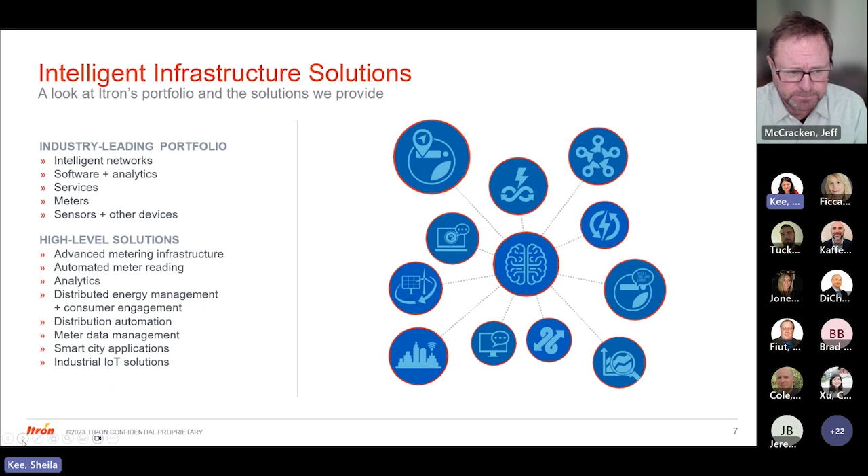So we know everyone's on a different journey, but what we're offering from a water end-to-end solution is a solution that's not dependent on where you're at in that journey. We can start you off with solutions to help with manual meter reading, and all of this is based on Temetra. If you're transitioning from manual reading to AMR, we can provide drive-by, walk-by solutions as well as the communication modules for those meters.

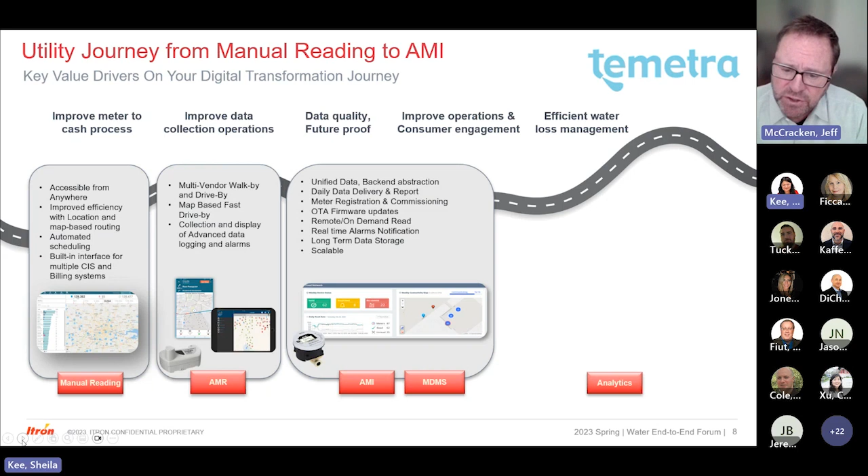And then as you transition from AMR to AMI and MDM, we can provide a full solution there with a unified backend, over-the-air firmware, remote shutoffs, long-term data storage, and all the analytics associated with that more granular AMI data, which we are going to demo today to show you how we can use that data to help manage your water losses. So anywhere on that path, we can help you migrate from one to the other, or just help from where you're at on that path, and help you improve your digital transformation at the utility.

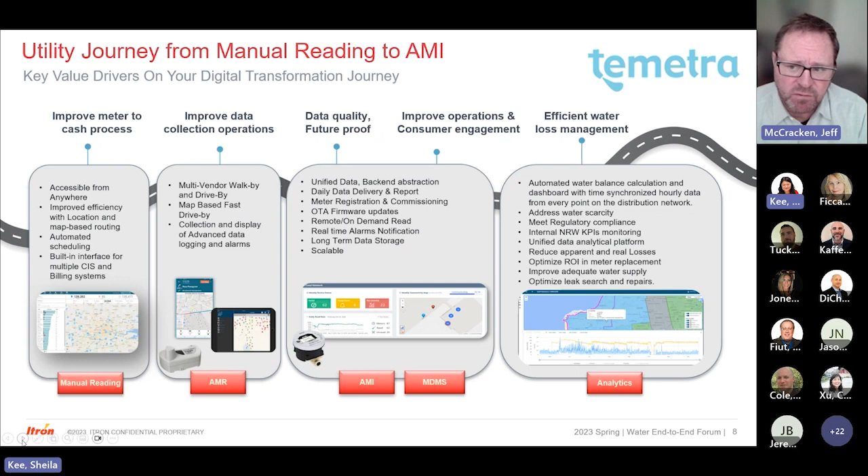With that, I'm going to turn it over to Brett Kaffenberger to talk about meters and AMI essentials. Thank you, Jeff. Welcome, everybody. My name is Brett Kaffenberger. I'm the line of business manager for our global water networks. So we're going to talk a little bit about water metering, and then I'm going to hand that off to Carmen. She's going to go into some more details on our cellular water solution.

So starting out here talking about meters, our modules essentially are compatible with every meter manufacturer that you're going to come across in North America. That includes pulse output and encoder output. So we maintain that as we always have, as essentially a differentiator, being able to read all these different meters from mechanical. Pulse is still used on compound meters, so you still see those out there. But just about everything else is moving to encoder. And then in addition to that, if you could go to the next slide, please.

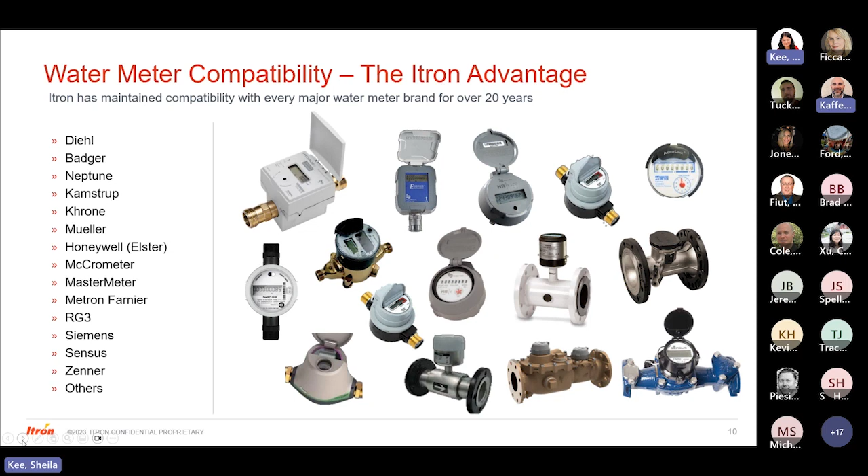In addition to that, we have extended alarms. So with our 500W series, whether it's our Gen X product line or it's our cellular product, we bring those extended alarms back over the network and display those in Temetra, which Brian will get into a little more as we move forward.

So what that essentially is: any of our radio modules, the 100W, 500W, will read the ultrasonic meters. But each ultrasonic meter, static meter in general, has an extended protocol that they can send out that gives you additional alarms such as empty pipe, temperature threshold, high flow, zero consumption, low battery, a tamper or cut cable alarm, reverse flow. And some of these are redundant in our radio module, but some of these are specific to the meter. So for the extended alarms, we support the Diehl Hydrus meter, the Kamstrup flowIQ, and the Badger E-Series meter. Next slide, please.

Okay, so talk a little bit about Diehl. So Diehl is the meter that we go to market with in North America. We have a strategic partnership with Diehl. For those of you that aren't aware of Diehl or don't know much about them, Diehl is a large global company, one of the top meter manufacturers globally.

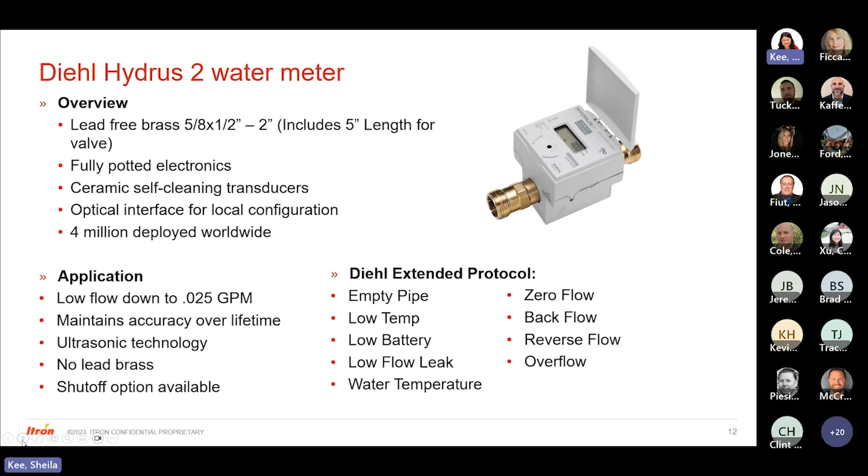So having said that, I will turn this over to Carmen to talk a little bit more about the cellular water solution. Carmen? Thanks, Brett. Again, it's Carmen Xu here. I'm the solution owner for AMI Essential Water and Gas. And today, I would like to share the exciting news with you with regards to the new bundle solutions for cellular AMI Essentials for water.

So let's talk about what's essentials. Semantically, we've been using this term to designate something that is necessary. It's absolutely needed, it's extremely important, minimally required, and we cannot do without. And Itron has begun using this term to describe the most core and basic offering for a lot of our products and solutions. And this includes meter data management with IEE, AMI Essential for electric.

So nothing new. We are expanding the same model, which is AMI Essential, what is basic and core, to AMI Essentials Water. And that's what I would like to share with this group, what exactly it is, what does it entail, and what are the value propositions. As you could see from this slide here, we try to make the solutions easy, meaning it has to be easy to deploy, no hassles to manage the system, and therefore this AMI Essential Water solution is a bundled solution that covers 4 elements.

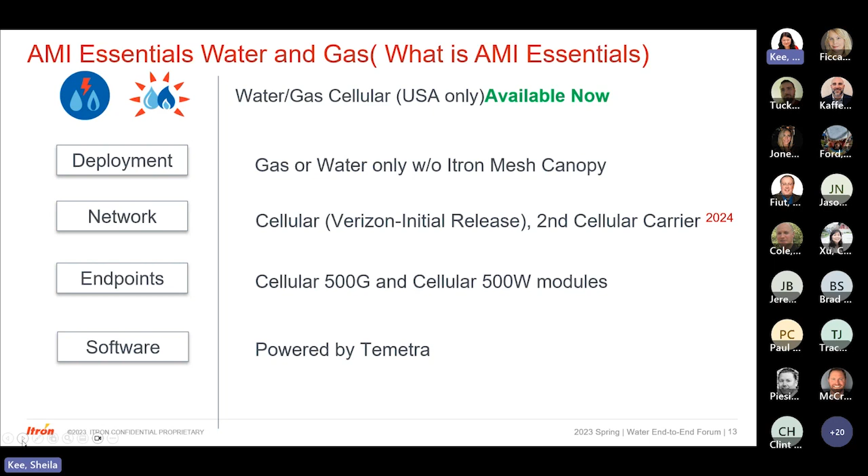So now we have a good idea of what AMI Essential Water offers. Who are the targeted customers? What are the number of endpoints? Like I mentioned earlier, this is a bundled repackaged solution that combines cellular technology, and our initial target market is US only. The reason is that right now we are working with Verizon, and we'll be able to get the Verizon network integrated with our endpoints.

However, we are working to expand from just Verizon to other cellular carriers, as well as other markets, including Canada. All of those items have been roadmapped, and once we have a committed date, we will share that back with this team. From a total endpoint per customer perspective, the solution covers any endpoint size per customer that's less than 200K.

The way we're going to sell the solution is to partner with our Itron channel partners, many of whom I saw on the call, as well as selling it directly to Itron accounts where a channel partner is not present. And as I mentioned on the previous slide, AMI Essential covers the cellular endpoints. It also includes management of the cellular network. The first cellular carrier is Verizon, more to come in the future.

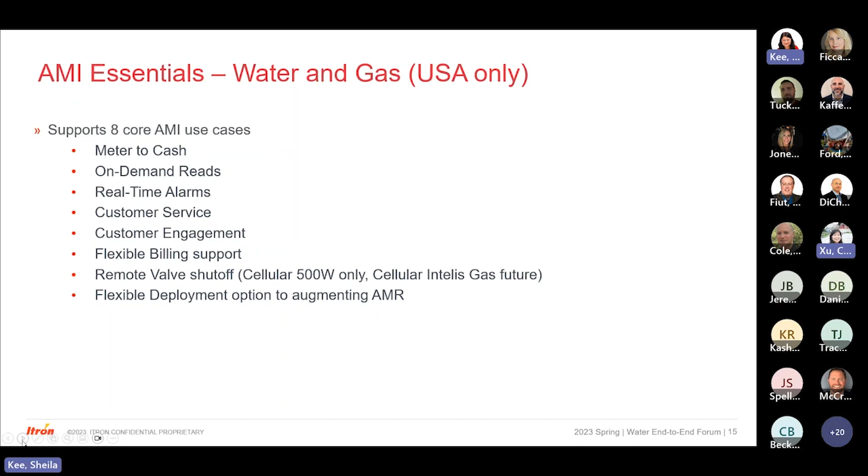And then lastly, flexible deployment options to augment AMR. So for a lot of the customers that currently are still on AMR deployments, having this AMI Essential cellular water solution ready offers you the flexibility to deploy cellular solutions to your maybe high value C&I customers and hard to access mobile routes as a complement to your AMR solution. So overall, those 8 use cases will be covered all under AMI Essential Water. Next slide, please.

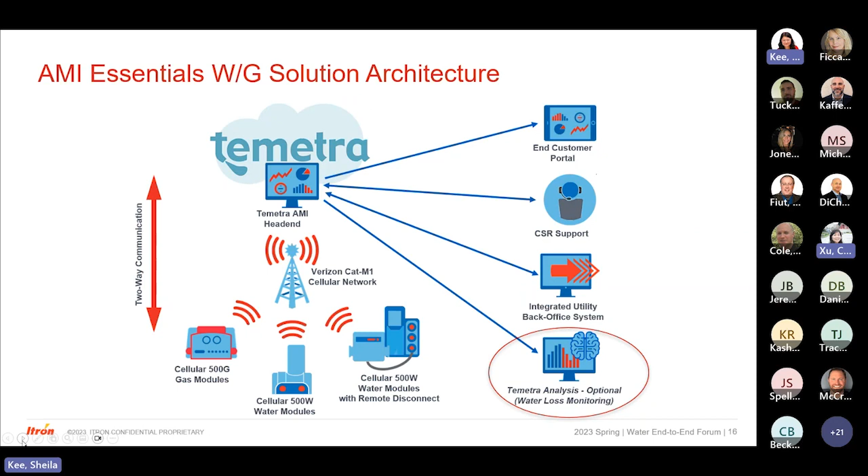All right, so we talked about the overall solution overview. Let's do a little bit of deep dive on the endpoint itself. No different than, I would say, the 500W endpoints that you guys have, it offers a similar functionality, meaning not only does it have the cellular capability, in addition it also has RF capability that is being added into a single communication module.

Why are we doing that? For example, if there is non-sufficient cellular coverage for a certain area, then you could turn on the RF capability to allow for a mobile network contingency read that will allow your billing data to still come in. So that is the beauty of having both cellular and RF capability in a single communication module on the Itron 500 cellular devices.

I did mention earlier, it is infrastructure free, meaning that you really don't need to have any APs or a centralized data collection unit, because we're leveraging Verizon's network. And the cellular 500W module supports the valve shutoff feature, which I mentioned earlier. And I already talked about the full 2-way cellular support that comes with our RF mobile contingency read in case there's not sufficient cellular coverage for a certain area.

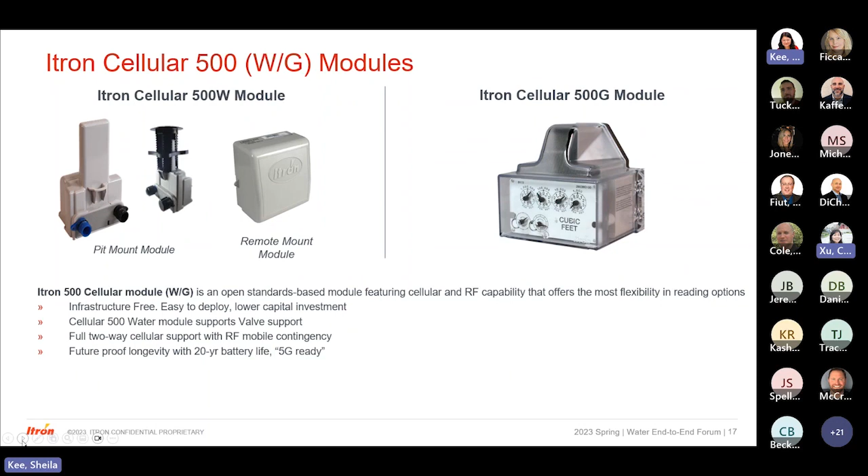So I want to pitch a little bit on cellular network as a service. Why is this a good value proposition? Why should we be offering cellular network as a service as part of our bundled solutions? Because number one, it really eliminates the challenge where you need to find towers to hang your data collection units. With the cellular solutions, even if you couldn't find any light posts to hang the APs, that's not a concern anymore, because you could have direct connections via the Verizon carrier-grade cellular network, and you'll be able to leverage cellular precisely when and where it makes sense.

And it does provide a good solution to bridge the gap for those hard to reach areas without extensive hardware installations like the mesh technology has. And I already talked about it's flexible, and you could certainly scale up and scale down. And it's very easy to deploy with very few components, as I articulated in the previous architecture slide. We talked about Itron's managed service, which removes all the setup, the carrier, and managing the network. All of this will be done by Itron on behalf of all our customers.

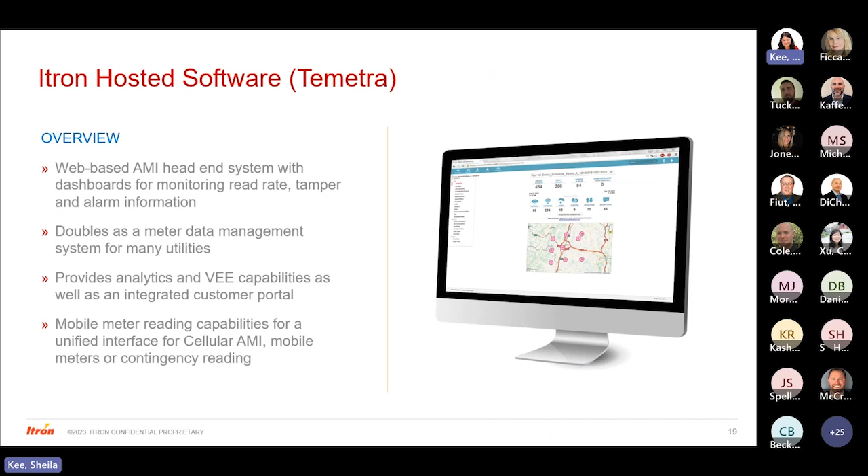The next two slides here: we're so excited about this new release of AMI Essential Water launch. And what Itron has done is that we put together what we call a Get Started Kit promo. The key driver of it is to offer an introductory level pricing to customers who are interested to prove out the cellular platform as well as Temetra benefits for a 12-month period.

Targeted customers are channel partners, or if there are direct accounts that do not have channel partner presence, certainly we can offer this starter kit promotion to those customers. From an eligibility perspective, any greenfield cellular customers are eligible to receive this introductory level pricing, which is the Get Started Kit. It is available now. So if you are interested, please reach out to your sales team to get more information on what it entails and what the pricing would be for the starter kit.

And I believe the next slide is my next slide here. So just a very quick overview on what the starter kit looks like, right? It comes with 100 units of cellular 500W, and it is promotional hardware pricing, which is limited to the initial 100 units. Anything above and beyond 100 units as incremental units will be charged at distributor list pricing.

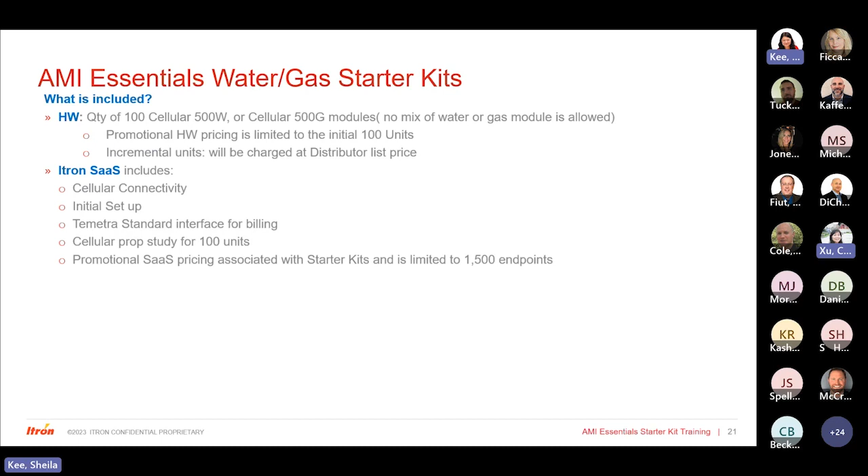So just to give you an idea of what it entails from a Get Started Kit perspective. Again, if you're interested, reach out to your sales team, and we'll be happy to share the pricing and more details with you guys. I think that concludes my last section.

Oh, I lied. So now let's say you have AMI Essential Water deployed. What are the future use cases that you could add on after you deploy AMI Essential Water solutions? Certainly from a water bucket space, there are a lot of water analytics offerings that we can add on to these AMI Essential solutions. That includes pump and energy optimization, water conservation management, pipe asset management, pressure monitoring, as well as leak management with acoustic sensors, sanitary sewer overflow monitoring and water quality monitoring. So having the ability to build that AMI Essential foundation is the key to expand those future use cases.

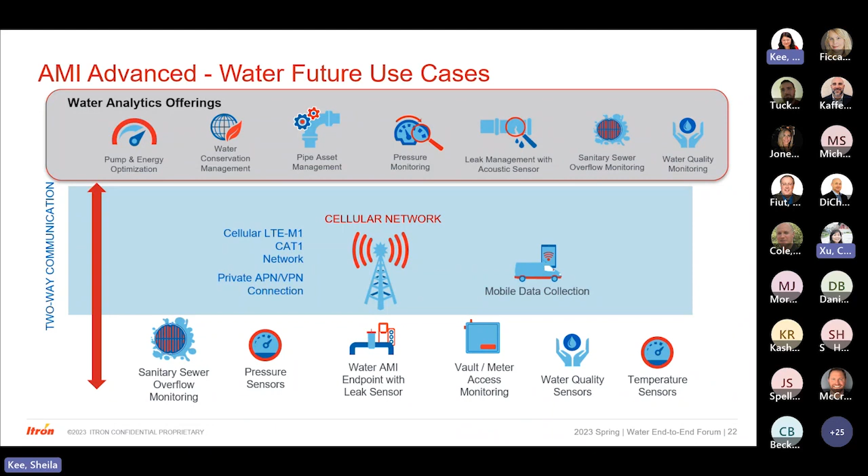Which I think takes us to the end of my presentation. And now let me just transition my section to Brian Tucker, who's going to talk about AMR to AMI. Awesome. Well, thank you, Sheila. Appreciate it. As Sheila said, my name is Brian Tucker. I'm a product manager with Itron working on our Temetra solution. And I'll be walking you through a few slides on how Temetra plays a role in transitioning from AMR to AMI.

So real quick, a high-level solution overview, just so we're all on the same page with the different pieces here. Our Temetra solution consists of two primary components. That's the Temetra web application, which is really the back office piece of the solution. That's your head end for an AMI customer. If you're a mobile customer, that's where you're going to be doing your route dispatching from, running your reports from, and ultimately interfacing to your billing system from.

The other piece to the solution is the Temetra mobile app. If you're familiar with our Itron mobile app, the Temetra mobile app is built on that. It looks 90% the same, which is nice for you as a utility because that means you have a very small learning curve to move your field employees over from Itron mobile to the Temetra mobile app. Of course, Temetra is also fully integrated with our cellular AMI solution. So if you choose to deploy cellular endpoints, those are natively integrated with our Temetra application.

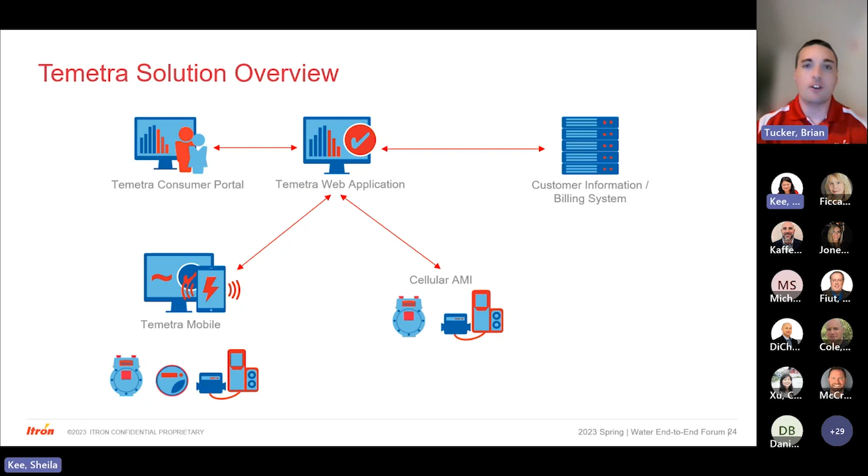And then again, those consumers, whether you're reading their meter with a mobile collector, an Itron mobile radio, or whether they're a cellular AMI customer and you're reading their meter multiple times a day, all of that data, as soon as it's available in the web application, is going to be made available with no additional effort on your part in that consumer portal. Want to go next slide?

Okay, so again, our theme here is moving from AMR to AMI and the role that Temetra plays in that transition. Because we know that many customers are still doing mobile meter reading today. Of course, there's aspirations and a lot of utilities are now wanting to move to AMI, but where they're at today in a lot of cases is still doing mobile or even keyed reads.

And so it's important that we pause and acknowledge that and talk a little bit about how we meet you where you're at today with those operations and how Temetra could start bringing you value right now for your operations, even without deploying AMI. And a couple of key pieces here, especially for our MVRS and our FCS customers, is that they can move to Temetra and generally keep their billing interface exactly the same as it is today.

And so if you're an MVRS customer or an FCS customer and you're still relying on and utilizing the host download and the host upload file formats to interface to MVRS or FCS, you can move those forward to Temetra, start passing those files to Temetra. And generally what we've seen is that customers have had to make little or no changes to those file formats to start using Temetra for their mobile meter reading operations.

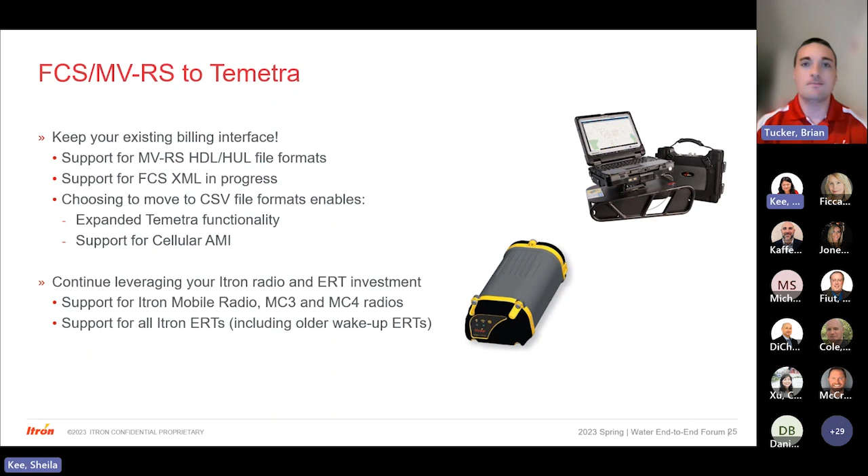All right, so as part of this move to Temetra, we've talked about how, as a mobile customer, as an AMR customer, you can move to Temetra today, and we've tried to make that transition as seamless as possible for you. And the good news is, even as a mobile customer, of course, we want you to move to AMI. We know a lot of you want to move to AMI, but even as a mobile customer, you're still going to see a lot of benefit and a lot of value by moving to Temetra from FCS or MVRS.

A few points there, map-based routing. So Temetra has the ability to allow you to pull up a map view, which will show you where all of your meters are deployed throughout your service territory. And from that map view, what you can actually start doing is lassoing certain meters within your territory and creating or modifying your schedules and your assignments to your field staff through that map-based view.

That can bring a lot of value for things like ad hoc routing tasks. If you're doing theft investigation and sending people out just to specific meters, that can help you a lot in terms of making that work more efficient, because now you can actually look at a map and create those assignments based on where it makes sense. So you can grab the meters in the north part of your territory or the northeast part of your territory, grab those meters, assign that work to the field employee who it makes the most sense to be doing that work, and so on and so forth.

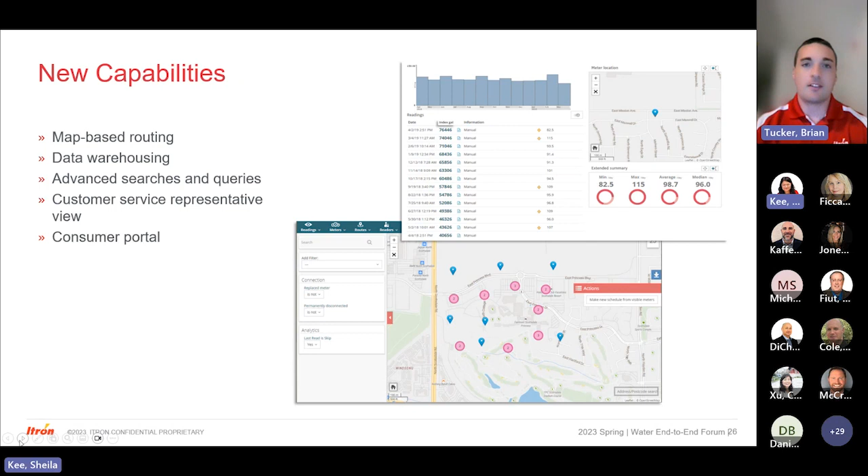Okay, so we've talked about the mobile value adds, the mobile migration to Temetra. Now you're ready to start moving to AMI, and you'd like to start sampling some cellular endpoints. By moving to AMI with Temetra, you're really going to simplify your AMI migration, because you can move to it at your own pace. You can continue leveraging Temetra for your mobile operations where it makes sense, while you roll out those cellular endpoints, maybe to your harder to read areas or those remote areas where it's really painful to read with mobile. And then continue rolling out those cellular endpoints when the funds are available and where it makes sense to do so.

While you're rolling out those cellular endpoints, Temetra is still going to be your head end. Temetra is still going to be your data warehouse, and your billing interface point is going to remain the same, whether you're talking about a mobile meter or an AMI meter or a keyed read meter. Your billing interface will remain the same, and you're not going to have to touch that and modify that, other than, again, providing us a CSV file with some information about those cellular endpoints.

And what this means is you're going to have a single interface point for all of your meter reading operations. You're not going to have to train your users on new interfaces as part of your transition to AMI. You're not going to have to necessarily go out and build a whole new interface as part of that transition to AMI. You'll see a couple of new workbenches appear in Temetra that'll allow you to view the status of that AMI solution. You can see an example of one of those workbenches within Temetra, where we're showing you how many valid reads we've been processing from the AMI solution.

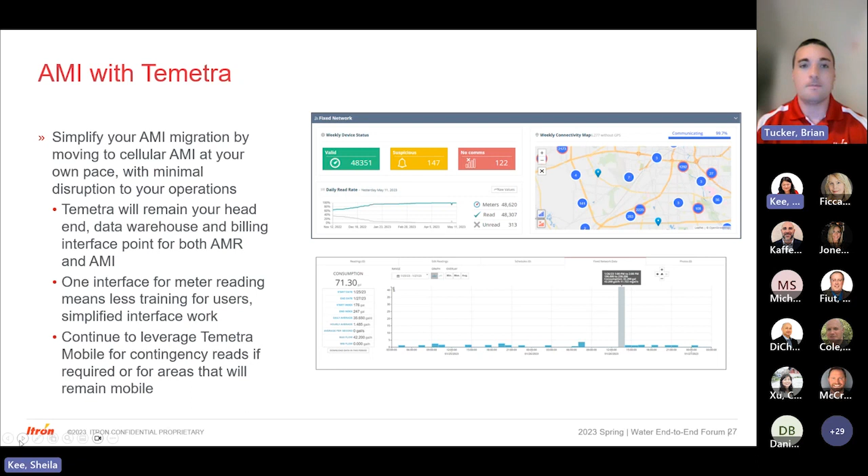All right, and now I'll turn it over to Sheila Kee, our Senior Product Manager, to talk through Temetra and Temetra Analysis. Thanks, Brian. Hi, everyone. I'm Sheila Kee, Senior Product Manager for Temetra Analysis, and let me advance the slide. As you have heard from Carmen and Brian, they've talked about AMI Essentials and Temetra, so I wanted to show you where Temetra Analysis lies under the Temetra umbrella.

So we'll go through the Temetra Analysis offerings in detail today. In this chart, you'll see eventually the entirety of our Temetra Analysis offerings. So you have the operational visibility application, which really is that automated water balance, whether it is hourly, daily, or monthly, monitoring your water loss KPI. There is also visualization of hourly flow, pressure, and tank levels, along with 48 hours of forecasting that provides the utility with that holistic view of your historical usage.

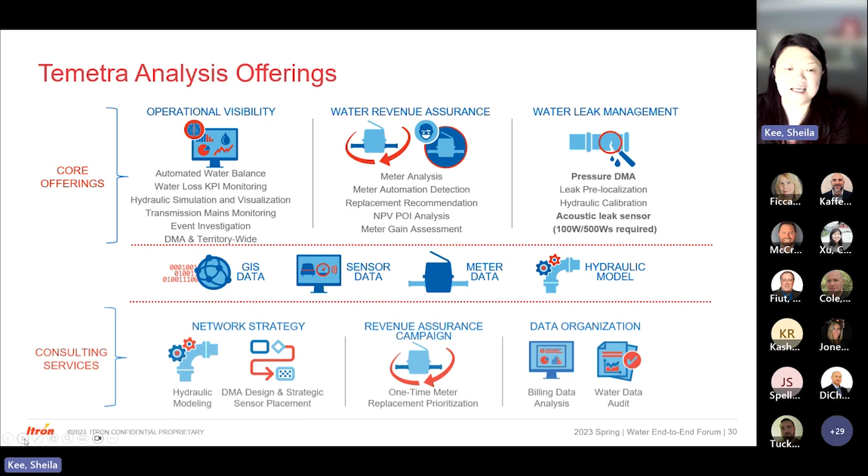For water leak management, Itron has two ways in which we can provide leak pre-localization. One of them is with the use of pressure sensor data and updated hydraulic models, and the other is with acoustic leak sensors, which do not need the presence of district meter areas, but you would generally need an Itron network to be in place. So we'll expand on these two offerings in the later slides. In addition, we can also provide a wide range of consulting services such as hydraulic modeling, design planning, strategic sensor placement, one-time meter replacement prioritization, billing data analysis, and water data audit.

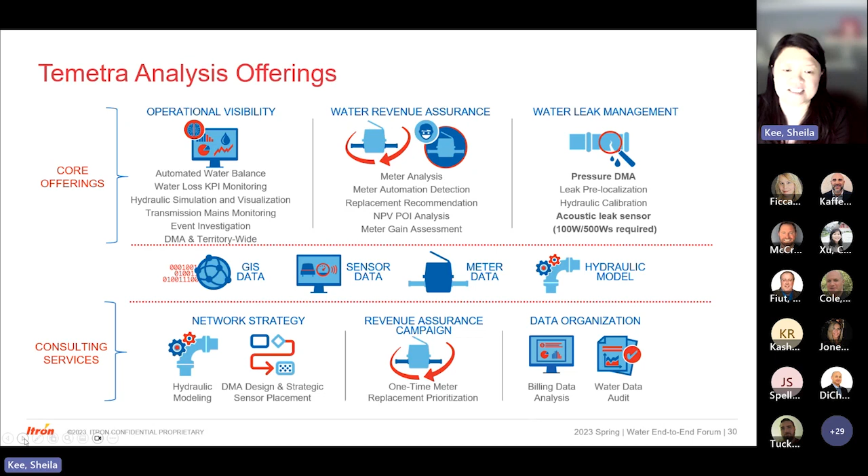So how does Temetra Analysis tie everything together? Let's look at the data flow with Temetra Analysis. So one of the data requirements to calculate the water balance table is consumption data. Consumption data can be collected via different types of Itron networks, such as your Water Cellular, GenX, Choice Connect. We can also ingest data from third-party systems, such as your GIS, hydraulic models, and SCADA. So through these actions, we can enable new outcomes that are focused on monitoring, measuring, and reducing water losses.

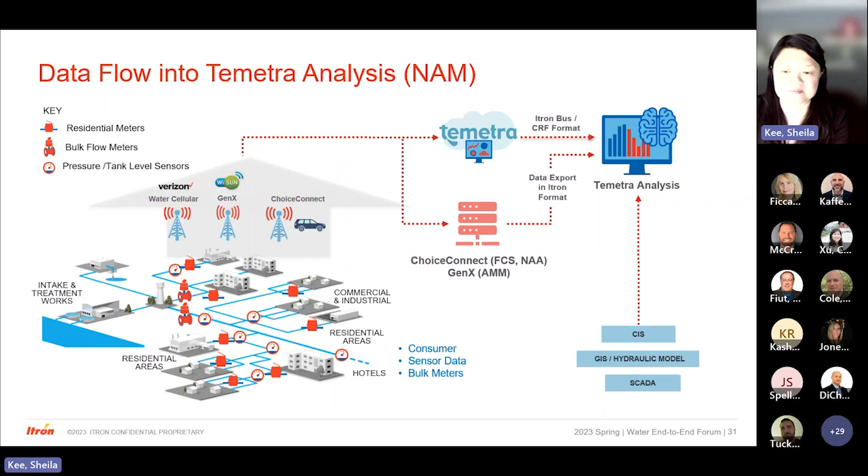So how do we achieve data readiness in managing water loss? This is really important. Traditional operations data sources include SCADA systems that collect and store data at very small intervals. GIS allows the users to access data in a geographic or spatial context like a map. This is especially important for utility operations. Your hydraulic models are used to optimize the network, help identify leaks, and help with seasonal demand fluctuation simulations. For drinking water utilities, meters represent a huge source of data that can be collected with the system. So AMI systems like Water Cellular, Choice Connect Fixed Network can help to automate your meter reading, your billing, and your collection process. So this really provides the utility with critical data and insights into the network infrastructure and customer behavior.

So we're able to ingest all of this data into our unified Temetra Analysis platform, where we would perform data cleaning, looking at data integrity and data completeness. So what does this mean? Data cleaning is basically the process of detecting and correcting or removing any corrupt data or inaccurate records from the database. Data integrity is the accuracy and the consistency of the data. Data completeness is the comprehensiveness or the wholeness of the data. There should be no gaps or missing information for the data to be truly complete. Sometimes incomplete data is unusable, but often it still can be used even with missing data. So in Temetra Analysis, we have the ability to gap fill the data.

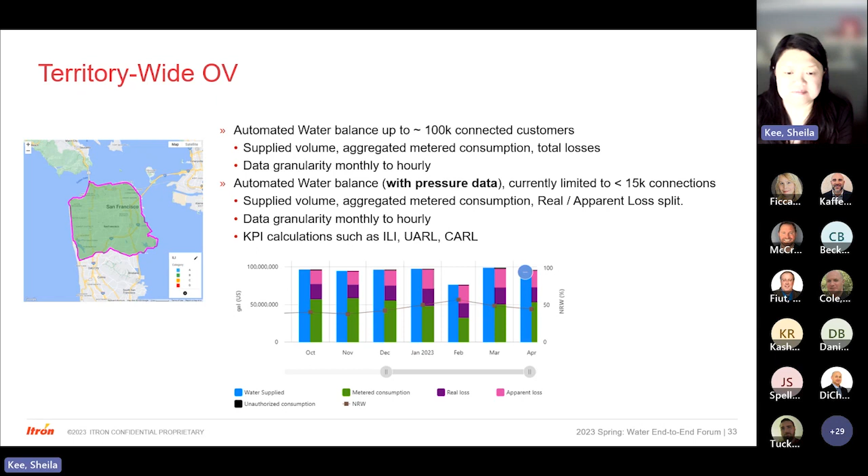And for the purpose of today's demo, I'm going to hand it off to Brian, and he's going to show you a demonstration of operational visibility. Brian.

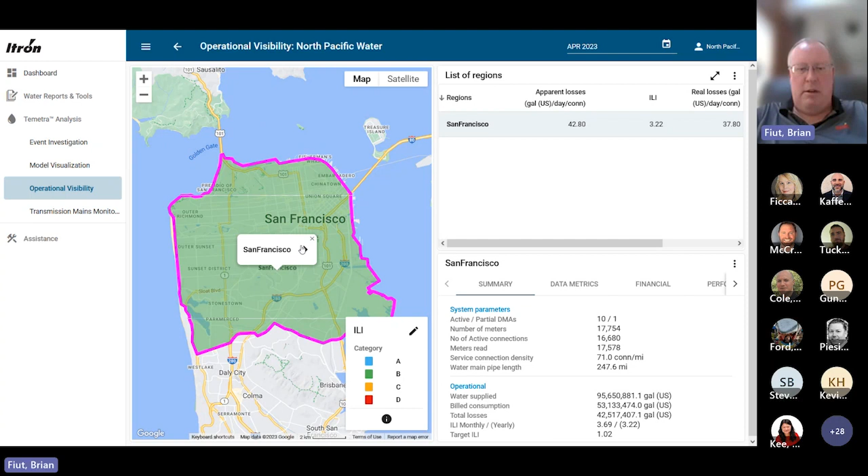So what we're going to do now is we're going to zoom in. I'm going to click on this arrow here, and it's going to take us basically to the same map, right? But you can see now that this Bay Area has been broken up into a variety of different districts, or DMAs, district metering areas. And we've employed a color coding technique.

Green good, red bad. I thought of that.

No, not really. But you can see over here, this table tells you sort of what the color coding is. Blue has an ILI, or an infrastructure leak index, sort of a comparative analysis, apples to apples against other utilities and standards. So we've got an ILI here from 1 to 2 is very good. That's your blue districts. Good, an ILI of 2 to 4 is green. Amber is getting worse. That's from 4 to 8 of an ILI. And red bad, green good, red bad. 8 or greater is considered a very poorly performing DMA.

So we've got a map view here. We can also switch to list view. And in this case, you now get a working list of all the same information, right? You can sort this by a variety of different KPIs. I can bring my top offenders into view here. For example, I've got ILI here. If I sort on ILI, I can see that my worst offender of all of those districts in my territory, pretty much by far, is DMA number 4. So I think we may want to come back and take a look at that a little bit later.

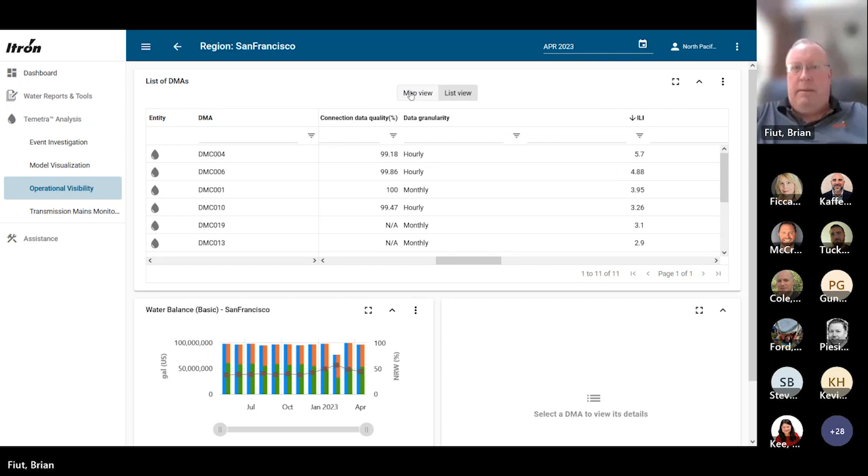Let's switch back to our map view. And then down below the map view is what we call the water balance table. All right, pretty straightforward. This is being presented with monthly data. So either we got monthly reads or we rolled up hourly data to represent monthly. And what you see here, I'll go ahead and blow this out so you can see it a little clearer. What you see month by month is your water balance up until the most recent month.

So the blue bar on the left of each month is the amount of water that was metered in through a bulk inflow meter, sometimes called a master meter. On the right, you have the green bar, which is the amount of water that was metered out by all of your meters, simultaneously aggregated and compared to the same time frame as the master meter. And then the red is your non-revenue water. And in this case, we're not doing so red hot. We're at about 44.45% non-revenue water. And this is for the entire region.

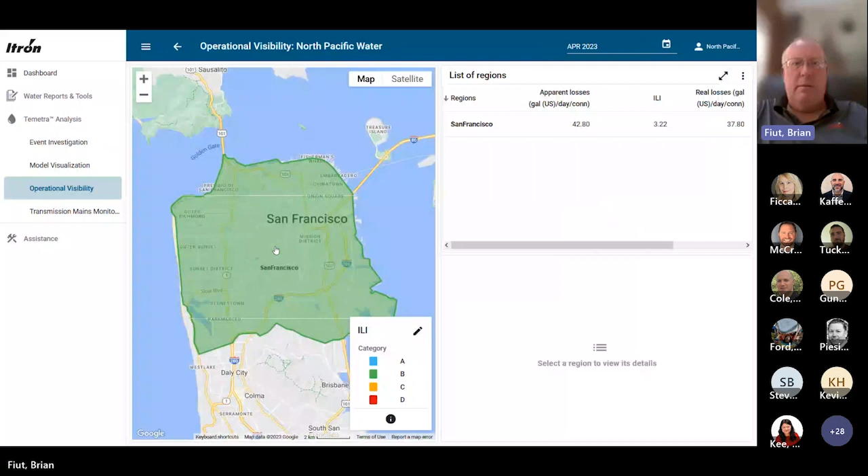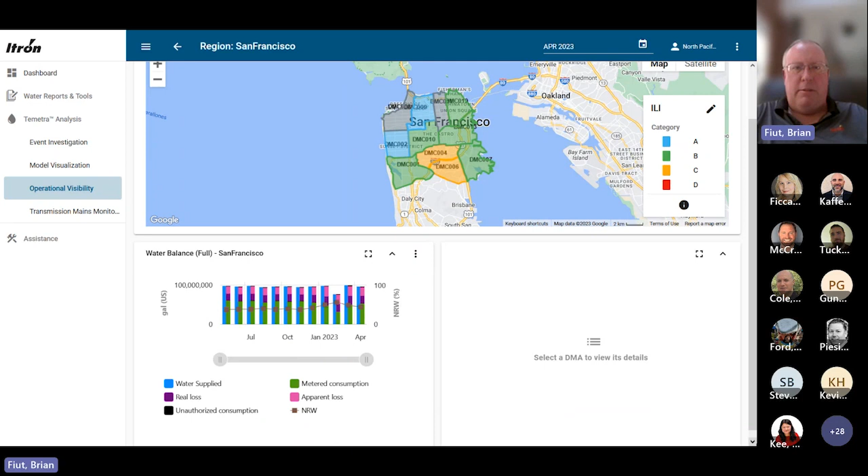Let me blow that back out. Oops, I'm going to reset here. Yeah, there we go. As I mentioned, we can break that non-revenue water down into a full water balance, which, as you can see now, the colors have changed from red to different hues of purple. The light purple or magenta, alert for you Get Smart fans, is an apparent loss. Okay, and the dark purple are your real losses.

So scrolling back up here, you can see that this is the KPI that I'm using now, the ILI. There's a variety of other KPIs that I can rearrange and look at the data with, including real loss. So let's take a look. And did you see how the map changed? Some areas became green from a leak perspective, while others turned amber. And so now, since I've got new information and a new presentment, I can drill into that and take a look at what's going on here. Let's take a look at this amber district number 6.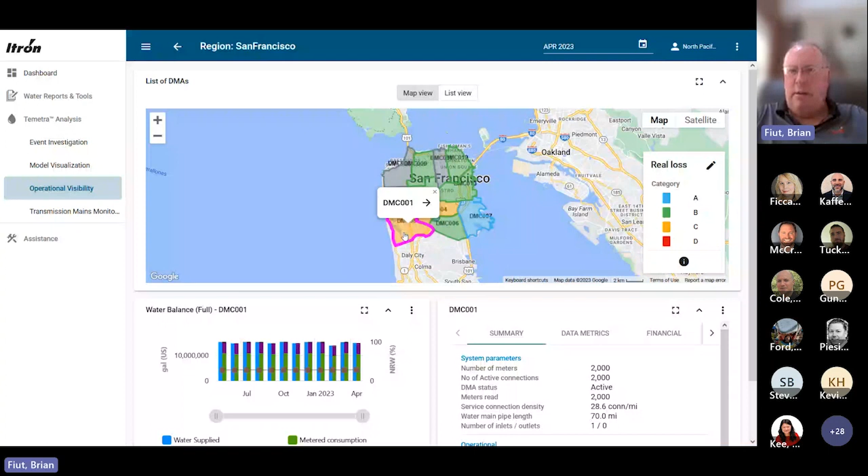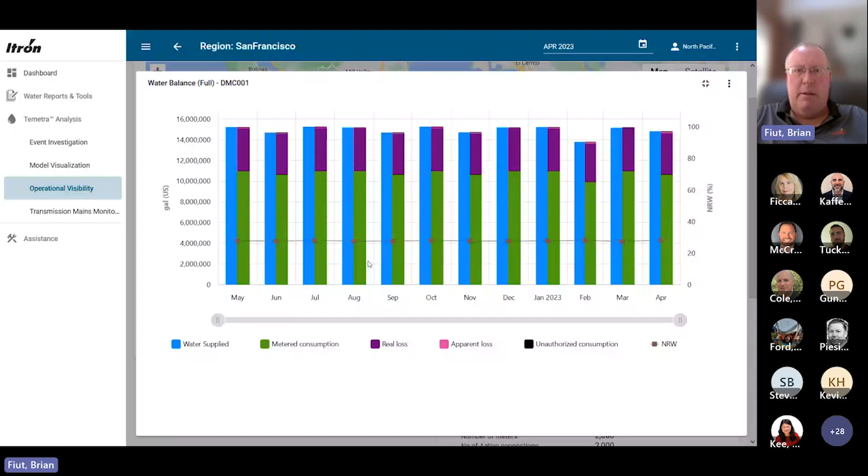I'll select it, and now I'm seeing the water balance table just for that district. I'll scroll down a little bit so you can see the legend. And pretty much as predicted, you've got the blue line for each month, the green line for each month. Let's see if I can make that a little bit larger. And what this is telling me is just what the map said. The non-revenue water for this district is predominantly a real loss, or a leak. So I very definitely have something going on here.

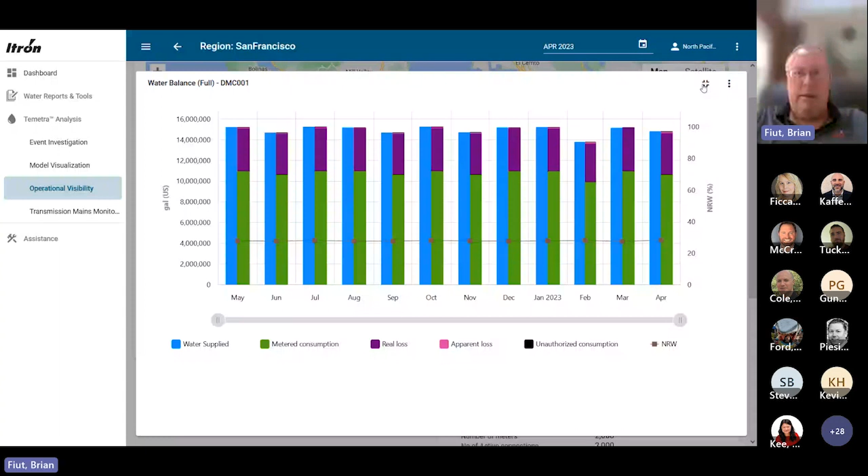And now that I know that I have some kind of a real loss issue in this district, DMA number 1, I can start to employ some of the Itron corrective actions with our water leak management solutions. As Sheila mentioned, we have a variety of solutions to track down the leaks in this district. We've got acoustic leak detection technology you can deploy to listen for the leaks. We've got pressure analysis techniques as a service that we can offer to you, again, to figure out where that is.

But the point of this exercise is that OV has now nailed down where you have leak problems, where to point your limited resources to go after leaks, and where things are fine and you don't really need to be doing, for example, territory-wide leak surveys, right? If anything, you want to focus those leak surveys on the 2 amber districts.

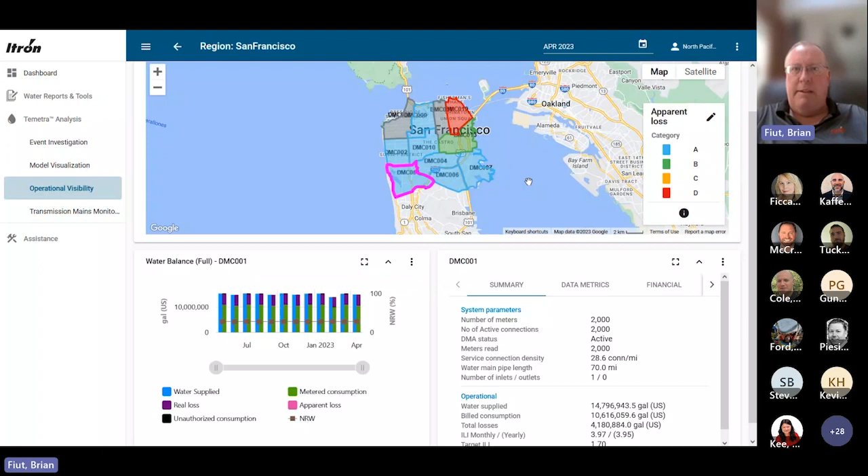In a similar fashion, I'll bring up my KPI table again here. I can also sort the data on the map by apparent losses. And again, you can see that the map once again changed. And while most of my districts are pretty clean when it comes to theft or mismetering, I can see up here in the Embarcadero area, I've got kind of a problem. So again, I'll click on that, and just as expected, especially recently, you can see that the majority of my non-revenue water in this area is the magenta color, or an apparent loss.

So again, there are a variety of tools offered by Itron that you can employ. Now that you know you've got an issue in this northern district, we can start employing revenue assurance tools, such as our meter replacement survey and a variety of other things that Sheila mentioned. That's where you want to use those solutions to track down that problem and then come back and measure it, right? Once you've gone through and found the thief or found the bad meter or meters, come back, take a look, make sure that that's now being shown as a green bar as opposed to a magenta bar.

All right, well, let's circle back then to our ILI analysis and take a look at something else.

How am I doing on time? So far, so good.

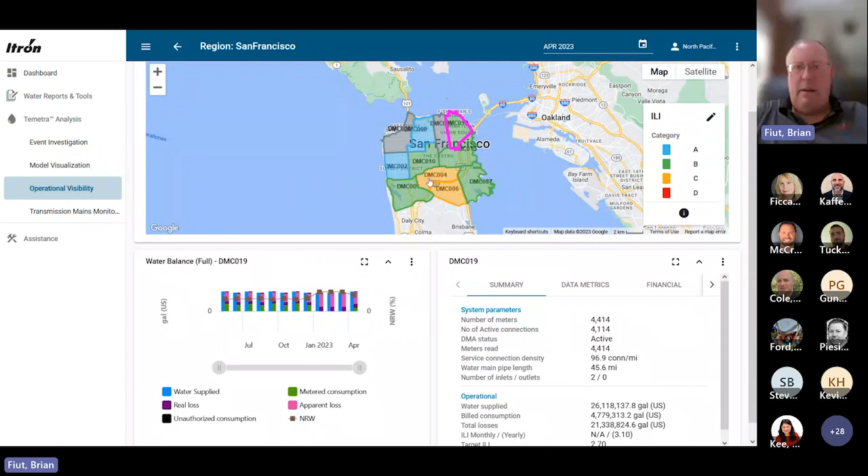We notice now when we're sorting this by ILI, the Infrastructure Leak Index, that my district here in the middle, DMA4, is amber. So let's take a look at the water balance table just for this DMA, and the solid line here that's coming up out of sort of nowhere in May and rising up to, what are we at here? 48.38% non-revenue water. Not great.

And so I think what I'd like to do is start to zoom in a little bit on this data. So I'm gonna go back in time, since we have all of this information. Go back to where that line first started to jump up. Looks like it's right around May or June. And since I have daily data, I'm going to zoom in on that. And sure enough, look at that. I'll zoom in a little bit more here. You can see that right around June 20th or 21st, I had a substantial jump in non-revenue water.

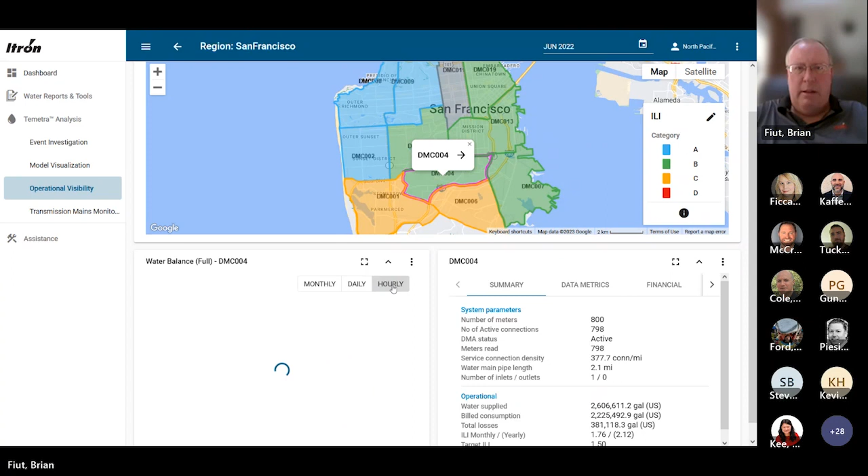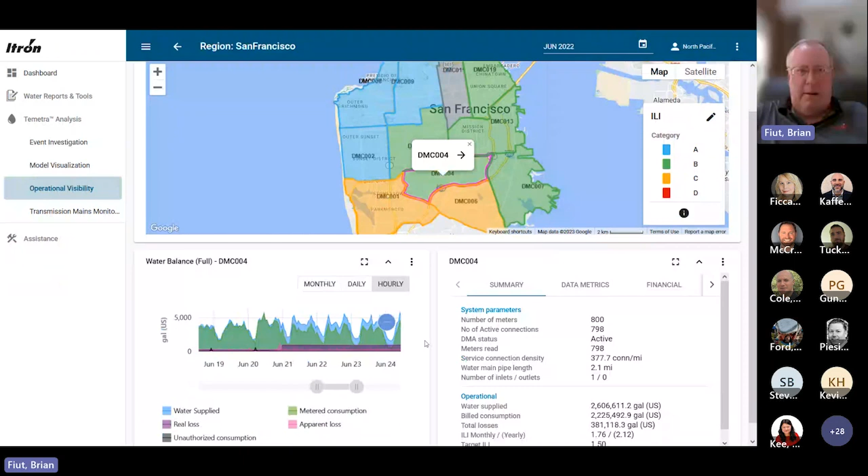And I'm going to drill in a little bit more here. Since I have hourly data, I'm going to zoom in a bit more and see what that's telling me. And again, I'm looking at the purple and the magenta colors here, the apparent loss and the real loss. I'm going to blow this out for you. You can see just about 6 a.m. on June 21st, well, a little bit before that, we had a very big spike in apparent losses. And then right after that, we had a significant jump in our leak, our real losses.

And so what I'm getting out of this, it's just one possible story. We have to investigate further. But what I'm getting out of this is that somebody probably got in there and tampered with their meter, probably a pretty big meter, a C&I meter, just judging by that jump in the dark purple. Somebody tampered. We had that apparent loss for a period of time, and they screwed something up. Whether they realized it or not, they've got a pretty massive leak now. Starting on June 21st, there you see that purple bar jump way up.

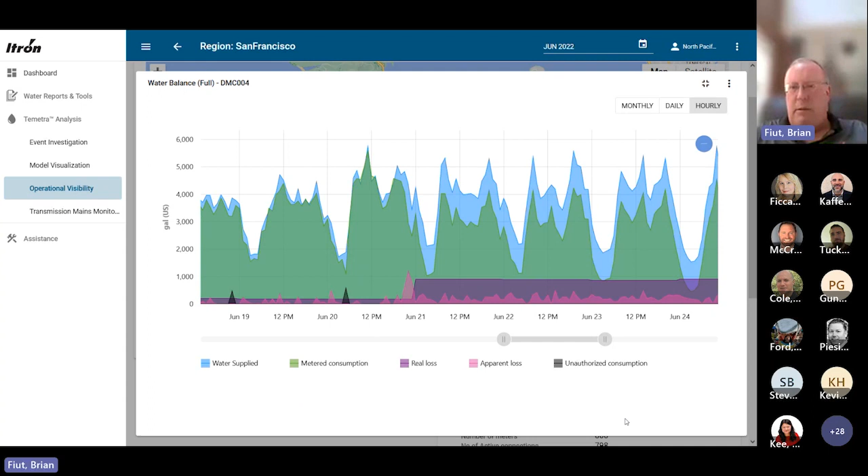Now I might have had my own crews out there, so it'd be good to check records, right? And see if we did repair work on a C&I meter. And it might help you figure out which one it is. Otherwise, like I mentioned, we can employ a variety of the Itron tools to start nailing down what's really going on.

Okay, I think in the time that I have left, I'd like to show you one more thing here. Yeah, I got a little time. So let's take a look at this district number 9.

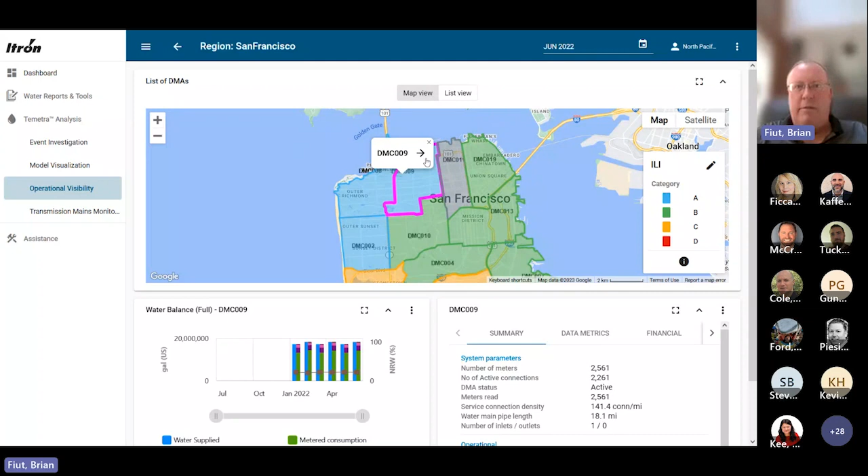And something new here I haven't showed you yet is that you actually have the ability to zoom in to each of these districts and not only look at the aggregated meter data, which is what that water balance table is, but you can actually look at the data that's coming from each of your sensors that you've deployed in each of your districts. So in this case, you can see that for that district, I've got one bulk inflow meter right here. And I've got 3 pressure sensors scattered around the district.

So I'll go ahead, let me turn off the forecast. Well, maybe I'll mention that. You can see here that Temetra Analysis, the OV module, has the ability to do forecasting out 48 hours here. And there's a pretty good correlation between the forecast and the actual data. That's a good sign. But to clear things up a little bit, I'm going to just turn that off for now. And what you see here coming in from this bulk inflow meter, right? This is the meter that's metering all of the water that flowed into that district, on an hour-by-hour basis.

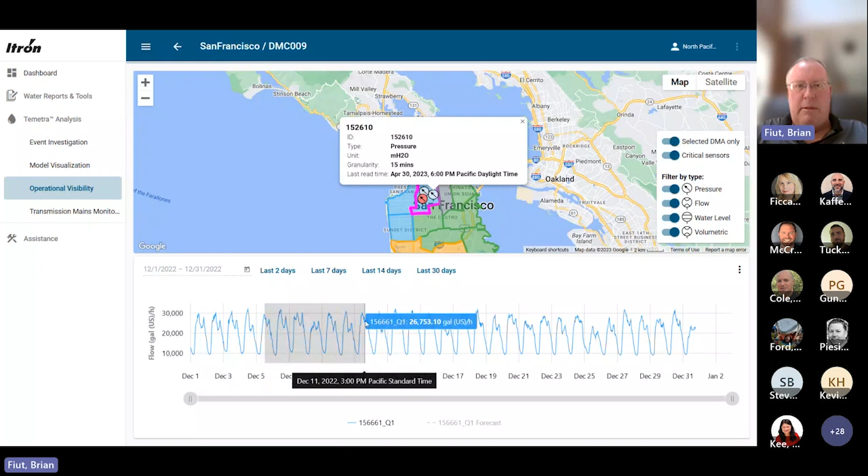And what you see here is very typical, what we call a diurnal curve, where in the morning, things start ramping up, consumption starts to go way up, people go into work or whatever. Then it kind of drops off in the afternoon and then picks up. There's usually a spike. And then it drops off into the middle of the night, what we call the night line.

And this night line here has special significance for some of our analytics, where we kind of baseline that as your minimum flow, and we can extrapolate from there. That's basically going to be your leaks. We can extrapolate there from total losses what your apparent losses is. So pretty ordinary, pretty typical view here.

So let's go over to that problem child that I had with the apparent losses. Let's jump over there. And we'll turn off this bulk inflow meter. Let's turn on the bulk inflow meter to the Embarcadero. And holy Christmas, look at that. Like I did before, I'm gonna turn off the forecasting. Off, please. And then this is just a wacky consumption curve.

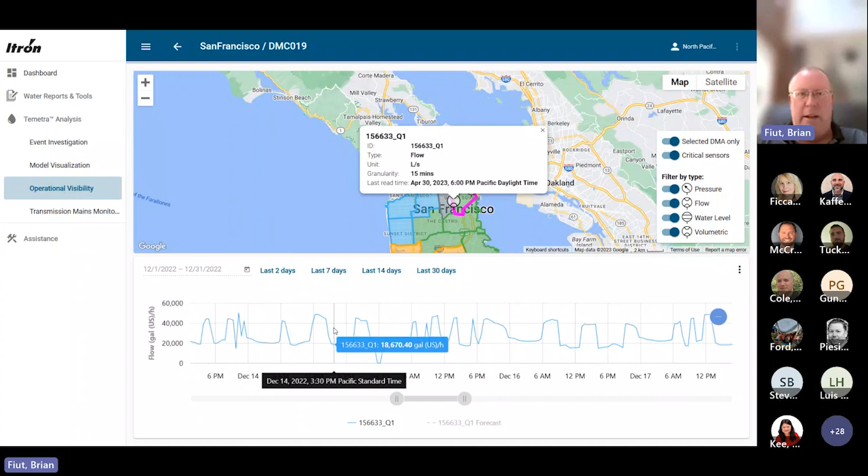I mean, look at this. It's up a little and it's down. It's very choppy. There's not a lot of flow to it. And sometimes it even goes to zero flow. It's completely cut off. Now, I don't exactly know what's going on here, except I know now that I have a problem. And I'm going to just throw something out there. I'm going to suspect that maybe we've got a faulty PRV, pressure reducing valve, that is really chopping the supply and sometimes even completely turning it off.

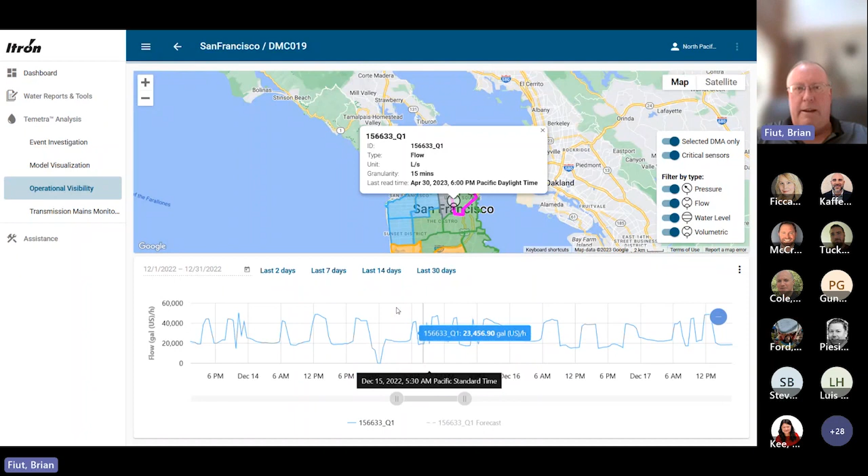This is the kind of thing that you'd want to start investigating right away. And it's the kind of thing that you can get in front of before it becomes a huge customer dissatisfier, right? Before the complaints start pouring in, you can see this information and respond to it.

All right. Well, I think that's about all that we can share today about operational visibility. And again, when it comes to non-revenue water, less is always better. So I hope you can see how the operational visibility component of Temetra analysis can help you spot, baseline and reduce your overall non-revenue water.

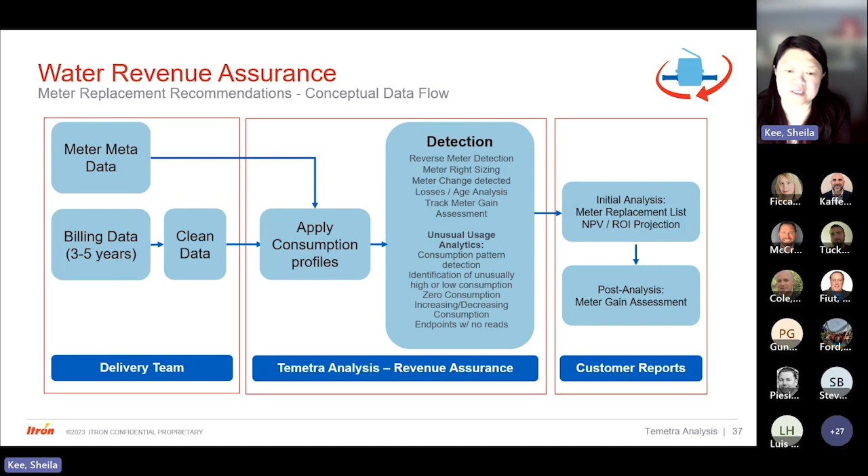So the utility will be able to prioritize their meter change out, taking into account their budget and resource availability. And so these meters can essentially be assigned for meter change out within the utility's work order system. And then once the change out is done, Temetra Analysis will monitor and track the billed consumption gain of these meters. So we will be able to demonstrate this in our future forums. We just don't really have enough time today to do that.

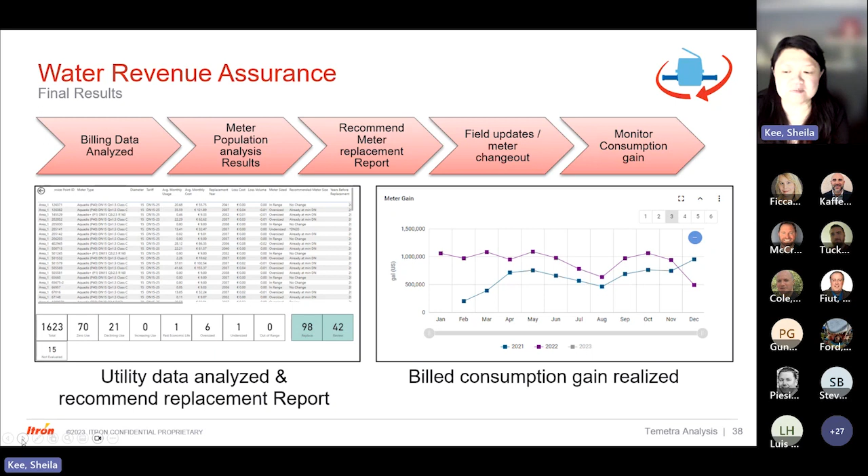And then for water leak management, as mentioned before, we do have two methods of providing leak management, one with pressure data and one with acoustic leak sensor. So let's talk about how we do it with pressure. So the concept is really having a calibrated hydraulic model that is generated for the area that needs to be monitored. And then you will have pressure sensors installed within the area along with the flow meters and consumption data to provide that monitoring solution to help you identify where the potential leaks are as they arise.

And then this solution also provides access to our highly trained hydraulic engineers who will then monitor your district meter areas or zones and use advanced modeling software to perform pre-localization. So this method, it is not as precise as installing our permanent acoustic leak detection devices, but it does allow the utility to go with a minimum amount of hardware investment to help identify areas that have high leakage, to segment the area and identify segments where the leakage is occurring.

And then the size of the segment really will determine the number of pressure sensors that are being installed. Ideally, we would like to have a minimum of 3 pressure sensors and maybe a max of 5 to 8 sensors, which is quite common for an area of around 2 to 4 square miles.

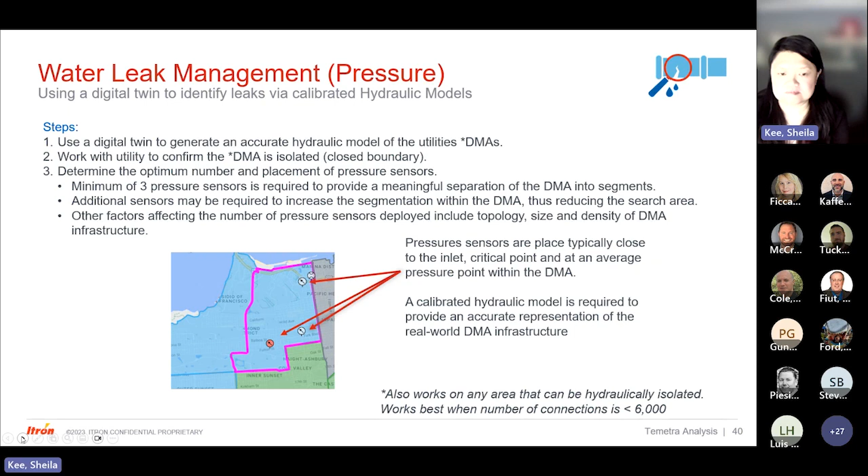So depending on the level of involvement required from our hydraulic engineers, we will work with the utility and within Temetra Analysis to identify these areas and segments where there could be high flow, low pressure that is being detected to indicate a potential leakage. So at this point, the utility would still have the requirement to send out their leak detection field crew to go to the highlighted areas for leak confirmation and pinpointing.

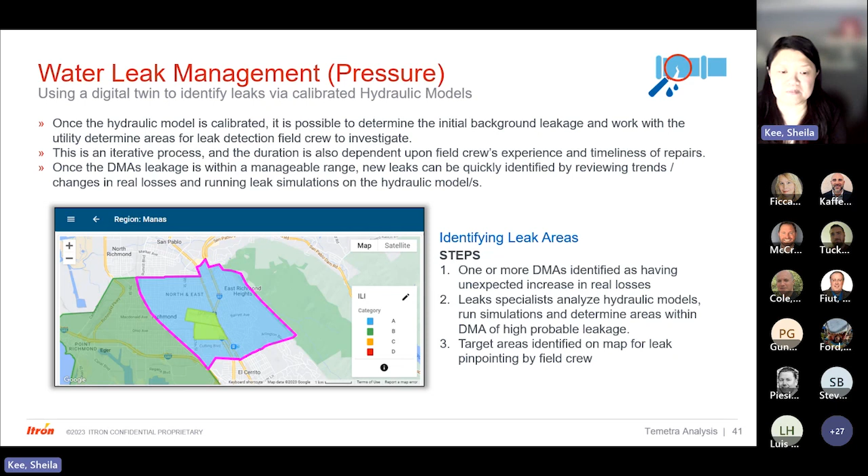And then the other method we have, which I think most of you are familiar with, is the Itron acoustic leak sensor. It is a permanent monitoring method that helps detect existing and newly emerging leaks within the listening range of the sensors. It will identify leaks within days and not weeks or months. It is permanently connected to the pipe, and the solution provides a daily leak survey of the area to be monitored. And it is designed to last 20 years.

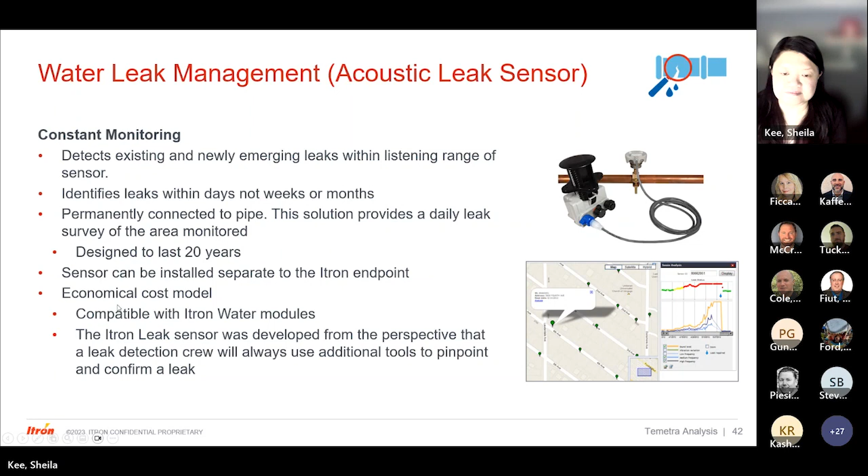The sensors can be installed separately to the Itron endpoint, and it is compatible with most of the Itron water modules. And the leak sensor was developed from the perspective that a leak detection crew will always use additional tools to pinpoint and to make sure there is confirmation of a leak before you start digging. And I think this concludes my section.

Jeff? Sorry, I couldn't get the mute button off.

So we're going to go into a short video, as I said earlier, of Beneath the Surface After the Storm that was published by the BBC. If you could kick it off for us, Sheila.

There you go. Yep, we're good.

My name is Cora Malcolm. I am the project and data manager of Provo Water Company here in the Turks and Caicos Islands. We're an archipelago of 40 islands, no fresh running water, no rivers, no mountains, no lakes. We rely on desalination to convert high salinated groundwater into fresh water. This means that fresh water comes at a high cost.

Water shortages are being experienced in all corners of the globe. So it is important that we conserve water and use it efficiently. In the case of Provo Water, back in 2014, we were at levels of 18 to 21% water loss in our network. It drove the decision to move to automated metering.

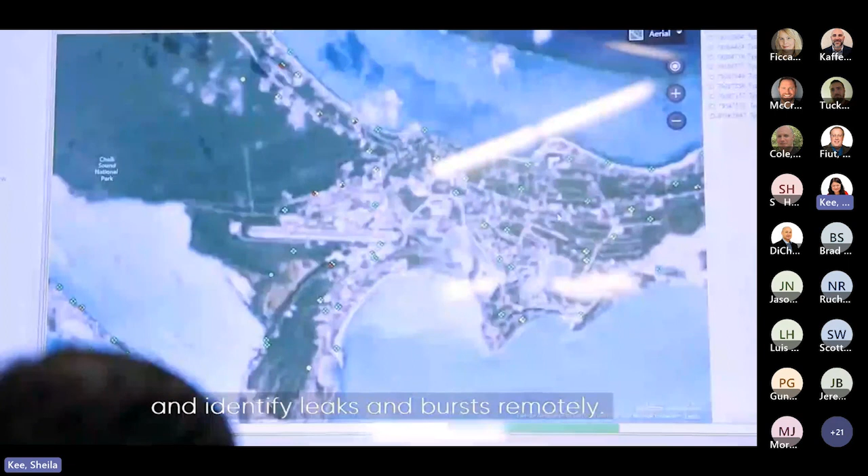I live in an area called Chalk Sound. It's on the southern side of Providenciales. I've been living here for over 20 years, and I love it. It's an inspiration to wake up and see the beautiful waters. It is calm, it's peaceful.

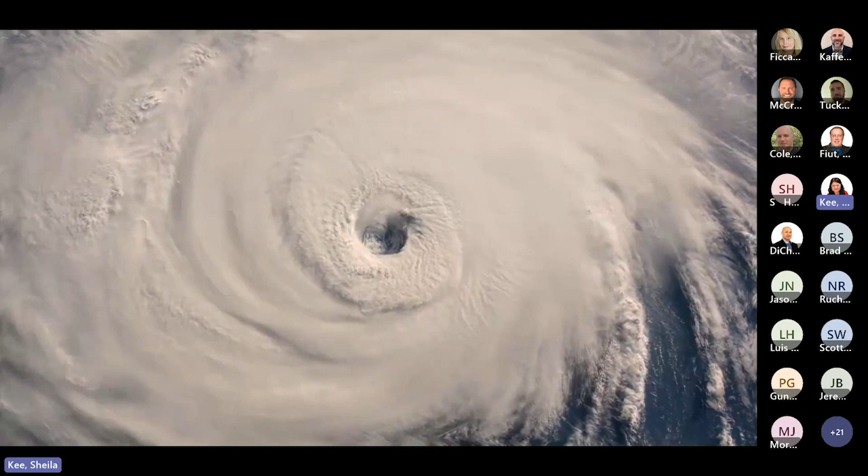Hurricane Irma, a potentially catastrophic Category 5 hurricane, is currently pummeling the Turks and Caicos and will head for the Bahamas before making a potentially devastating...

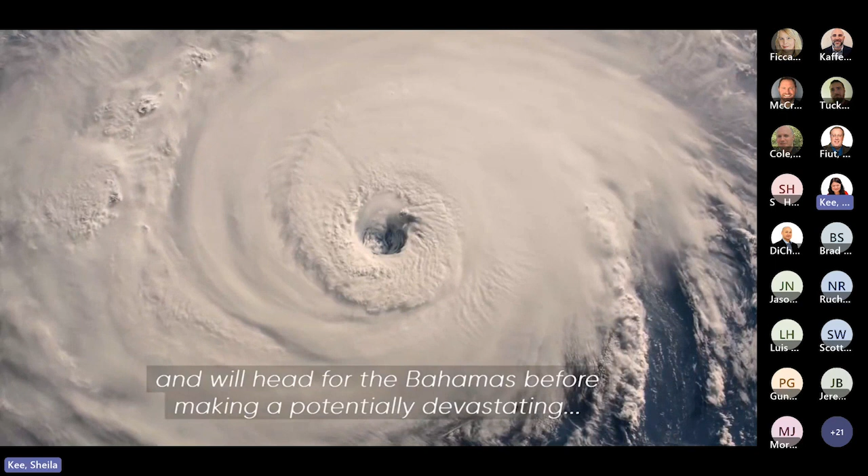Hurricane Irma came in September of 2017. Me personally, I've lived through quite a few hurricanes, and I think that was the most scary hurricane that I have ever experienced in my life. You can hear windows like they're shaking, like they want to vibrate. The sound is just one that is unbearable. You never can forget it.

It seems as if every hour was going by very, very slow because you were praying for this hurricane to pass, and it seems like the hurricane was never going to pass. It was touching.

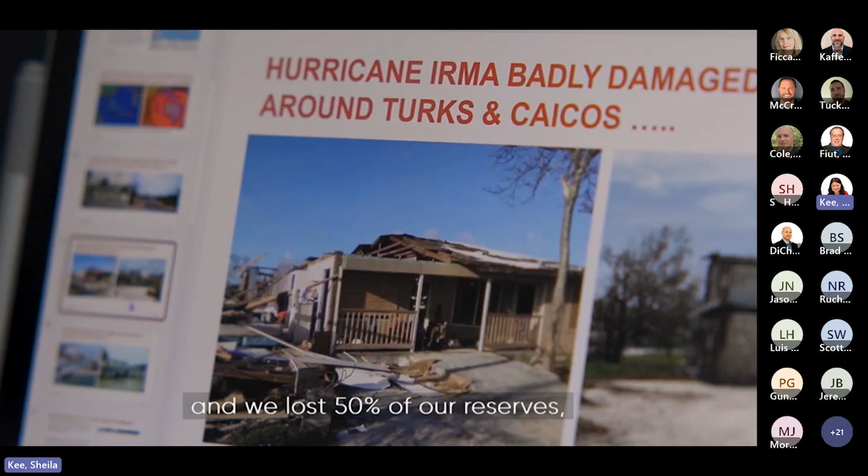Overnight, Hurricane Irma impacted our network, and we lost 50% of our reserves, which is approximately 3 million gallons, affecting all of our schools, homes, hospitals, airport. It was essential that we get the water back up and running, to get the community back up and running.

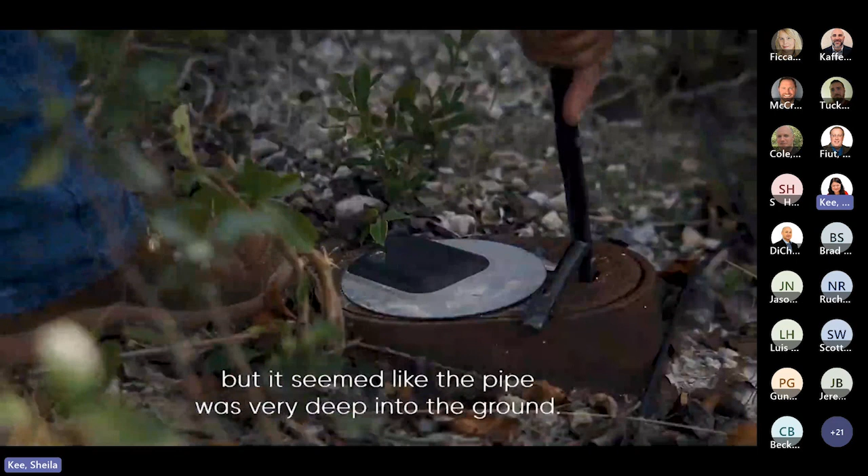About a few days after the hurricane, we had no water at all. And I was wondering what happened. Provo Water said to me, we'll have to check your system. So they sent out a technician. It seemed like the pipe was very deep into the ground. There was a leak about 4 feet below the ground.

You cannot survive without water. You can survive without electricity, but you cannot survive without water. So the water was a challenge for a lot of people. After that problem was solved, there was no more leaks.

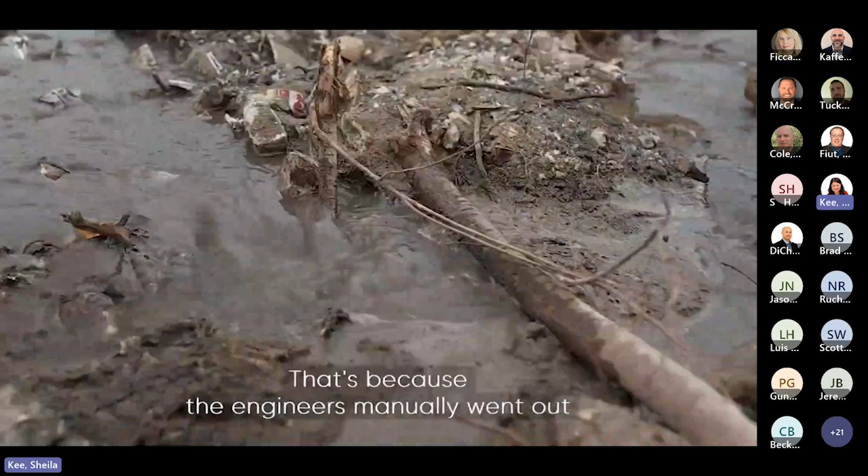Previously, when doing leak detection work, it could take anywhere from 7 days to 14 days before a leak could be identified. That's because the engineers manually went out and read all the meters under a district. With AMI, we are able to get those readings every hour. You can't fix what you can't measure. So really solving any problem starts out with being able to measure it accurately.

Itron's AMI solutions enable consumers to use water more efficiently. They can understand exactly how much water they're using, when they're using it. They can then go ahead and make personal decisions in order to reduce their water consumption. As I look at what we're able to do and the positive impact we can have on people's daily lives, that is truly inspirational for me.

Through use of AMI, Provo Water was able to restore full services and fully pressurize the network within 2.5 weeks. Prior to AMI, that would have taken us 2 to 3 months to do that. Water may sound like a simple thing, but it's a very important commodity for a livelihood, for families, for business, for everyone.